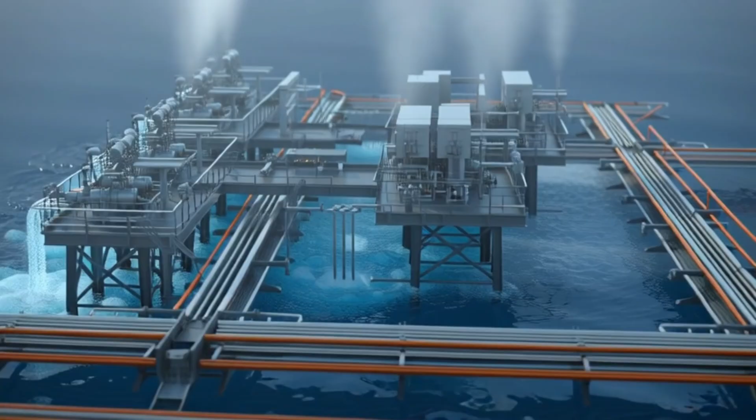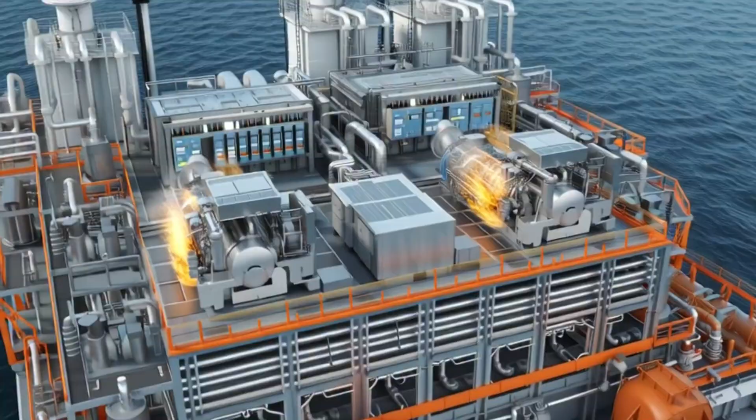Far beyond the coastline, where the ocean erases every trace of land, there exists a world built for endurance, precision, and survival in complete isolation. It is not a vessel built for transport. It is a permanent offshore industrial city, extracting, processing, storing, and exporting crude oil directly from beneath the ocean floor.

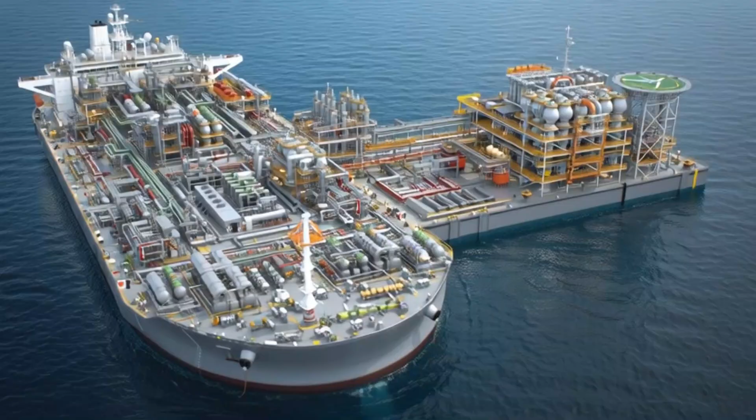These reservoirs remained hidden and unreachable for most of human history, locked inside porous rock formations, deep beneath layers of sediment and time. When the reservoir is reached, completion systems are installed, including steel casing, cement barriers, and safety valves that convert the well into a controlled production pathway.

Risers connect the seabed to the FPSO, carrying production upward through flexible structures designed to withstand constant motion caused by waves and currents. Each phase of separation is monitored by dense sensor networks that track pressure, temperature, and flow composition in real time across every processing module.

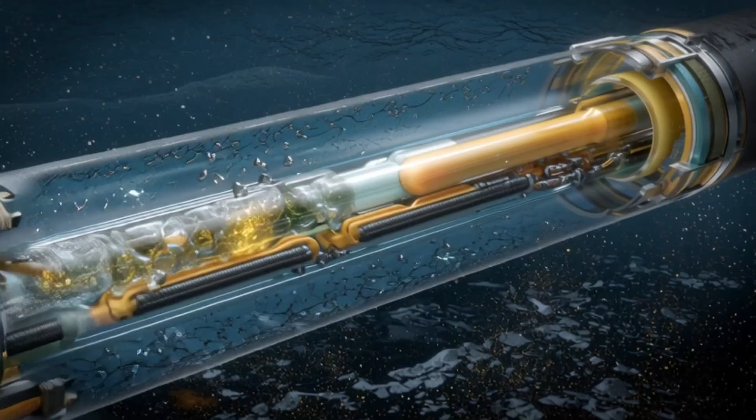These flow lines remain active regardless of surface conditions, ensuring uninterrupted energy transfer from reservoir to production system above the ocean. On the surface, the vessel continues to respond to subtle ocean movement, translating wave energy into controlled structural motion rather than resisting it directly.

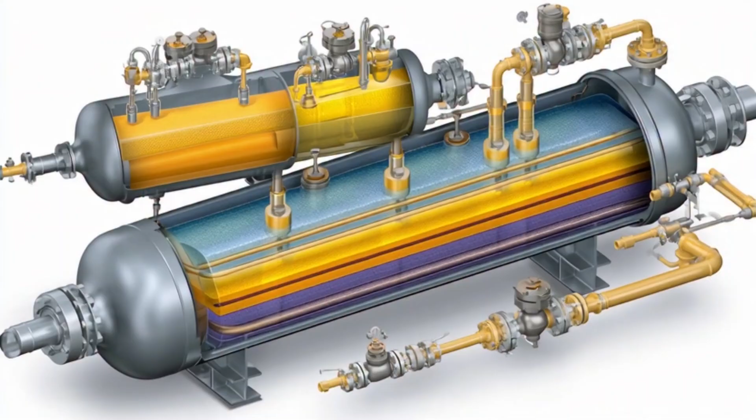As environmental conditions shift, structural loads are redistributed across the hull and mooring system to maintain balance and prevent excessive stress concentration. Even minor changes in pressure or temperature are immediately compensated through automated adjustments that preserve system equilibrium.

Cloud formations grow denser and more structured, indicating shifting pressure zones that slowly influence wind patterns across the offshore field. The FPSO does not wait for conditions to worsen. It begins adjusting operational parameters in advance to maintain equilibrium under evolving environmental stress.

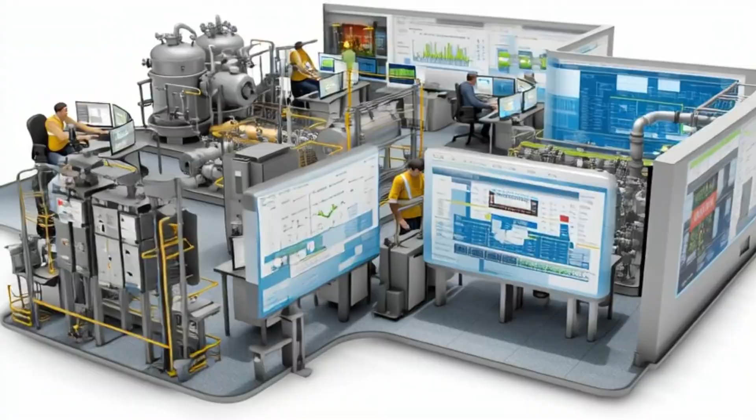Operators observe updated forecasting models that simulate potential storm development and its possible impact on offshore infrastructure. This engineered flexibility ensures that production remains stable, even as mechanical loads gradually begin to fluctuate more frequently. These early wave interactions are not yet dangerous, but they represent the beginning of a broader environmental transition.

This redistribution of operational stress is part of the system's core design, allowing it to remain stable under changing external forces. Inside processing units, automated systems maintain optimal separation efficiency, despite gradual shifts in incoming fluid composition.

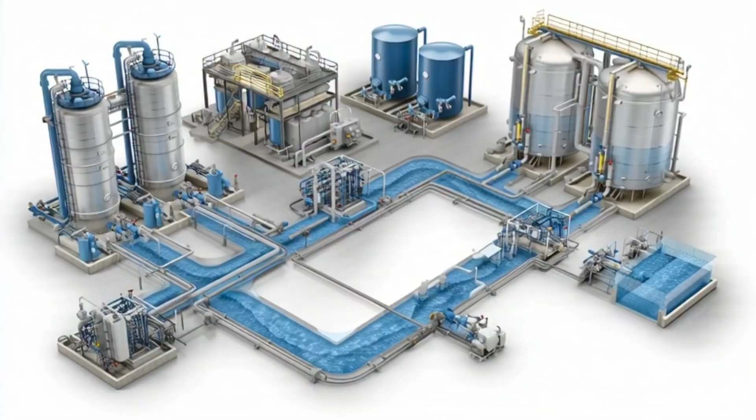Wind intensity increases gradually, creating stronger surface friction that starts shaping longer and more energetic wave formations across the field. Production continues, but with heightened operational awareness as systems prepare for potential load redistribution across processing and structural networks.

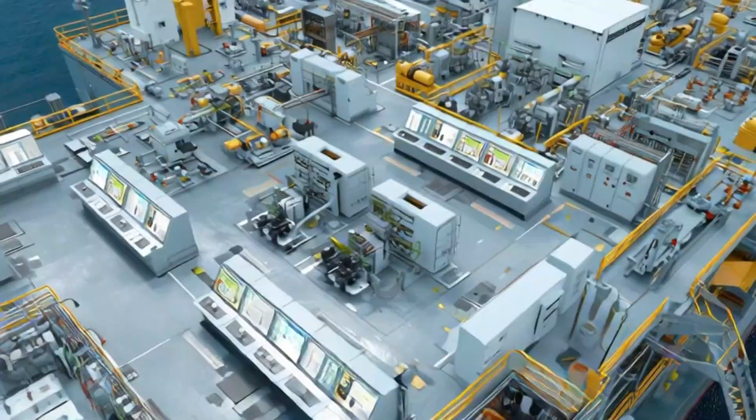Control systems adjust internal distribution of load across processing modules, ensuring no single subsystem becomes overstressed during environmental escalation. The vessel maintains stability through continuous feedback loops that adjust mooring tension, processing loads, and subsea flow regulation in real time. Processing units maintain output stability as internal automation compensates for external fluctuations in feed composition and pressure dynamics.

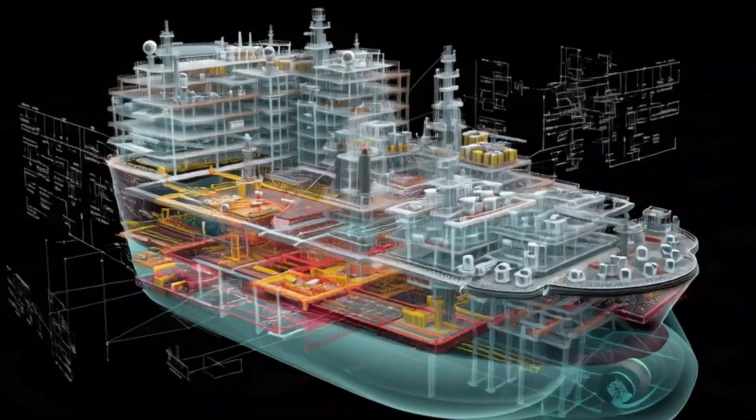The FPSO responds through engineered motion, allowing controlled displacement while maintaining stability through its mooring system and structural load distribution. Subsea systems remain active, transporting hydrocarbons through risers that flex continuously in response to increased surface motion and structural displacement.

The FPSO maintains operational continuity through dynamic adaptation, redistributing loads across multiple systems to prevent localized structural stress accumulation. Every subsystem operates under heightened supervision, with continuous data integration, ensuring that no deviation goes undetected or uncorrected.

This is the highest stress point of offshore operation, where engineering design is tested against the most extreme environmental conditions encountered at sea. The vessel maintains stability not through stillness, but through continuous adjustment to every changing force acting upon its structure. The FPSO maintains controlled stability throughout this transition.

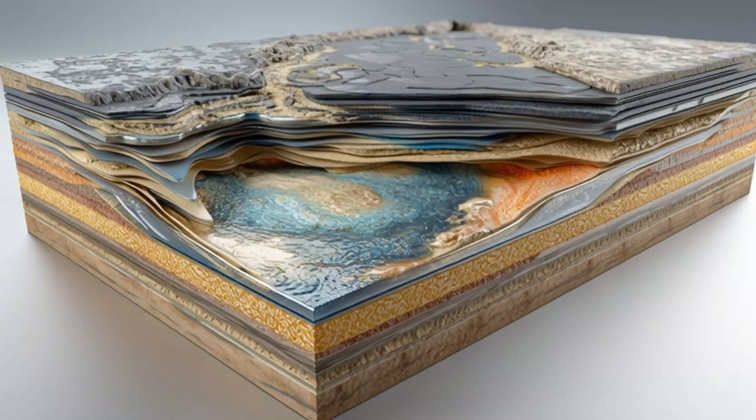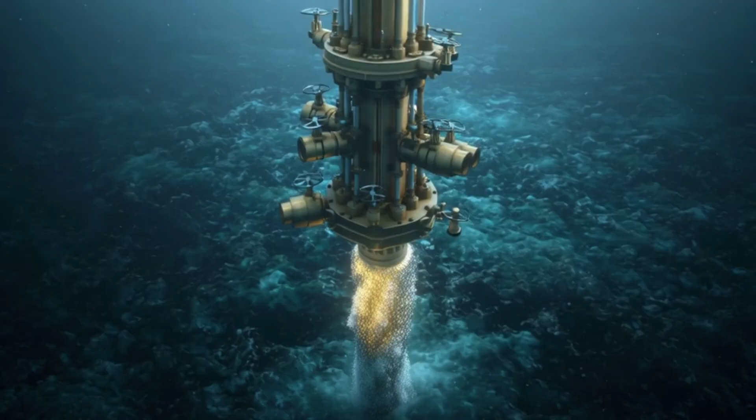Continuing reduced production while environmental forces gradually lose their extreme intensity. As conditions stabilize, internal systems begin recalibrating, restoring optimal efficiency in compressors, separators, and processing modules.

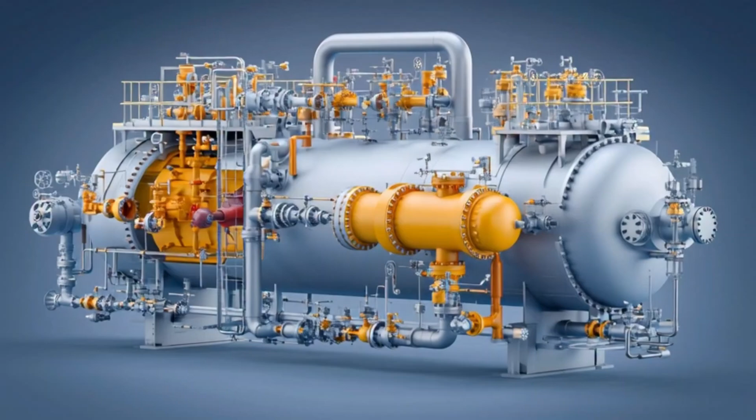Production rates are gradually increased under controlled conditions, ensuring that system load remains balanced during the recovery phase. Control rooms maintain structured oversight, ensuring that recovery progresses safely across all mechanical, structural, and subsea systems.

Subsea infrastructure continues functioning without interruption, demonstrating the long-term resilience of deep-water production networks. This phase represents controlled recovery, where offshore systems transition from emergency adaptation back to optimized production stability.

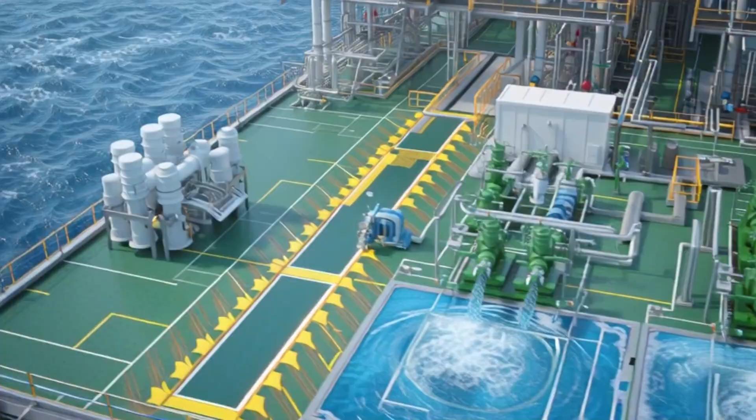Control systems shift fully out of recovery mode, returning to standard monitoring while maintaining continuous awareness of environmental variability. Subsea flow lines continue uninterrupted transport of hydrocarbons, demonstrating the long-term resilience of deep-water production architecture.

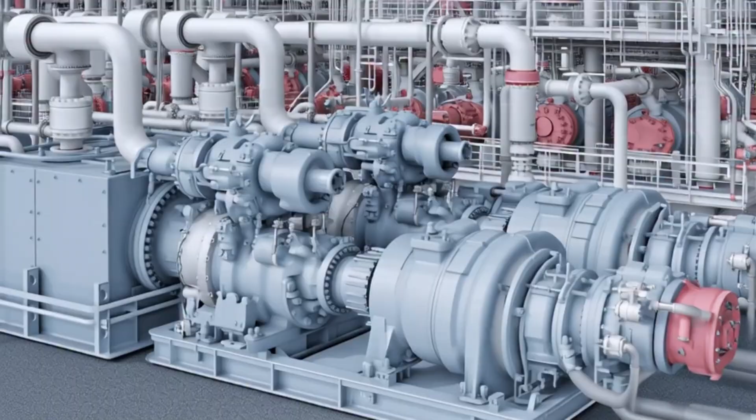Sensor networks continue to analyze system performance, comparing post-storm behavior with baseline operational models for accuracy validation. Control rooms maintain structured oversight, ensuring continuous synchronization between production output, storage capacity, and export readiness.

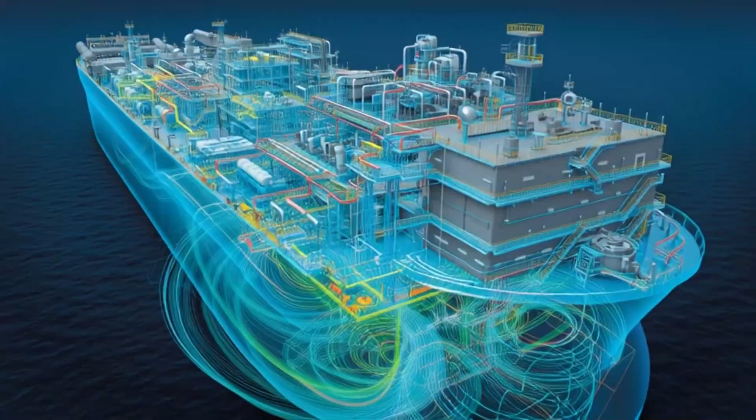Environmental influence remains constant but manageable, requiring ongoing adaptation rather than emergency response or structural intervention. This phase represents post-event stabilization, where the system consolidates performance improvements derived from real-world operational stress exposure.

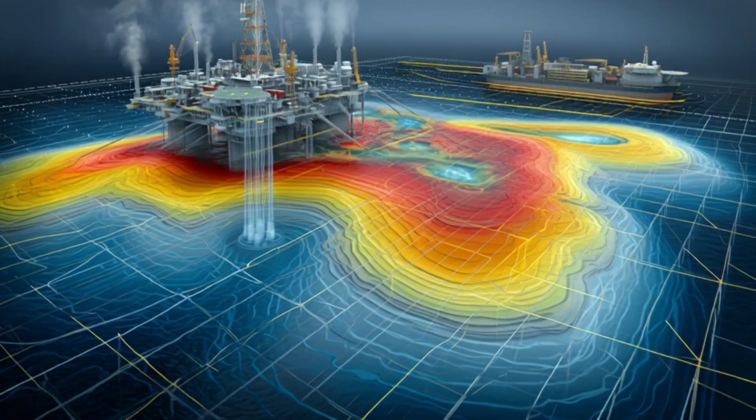Production systems operate in perfect synchronization, where thousands of interconnected components function as a single continuous offshore structure. Control rooms maintain full oversight of global operations, where engineers and operators coordinate real-time adjustments across all production systems. Flexible offloading systems ensure safe transfer between moving vessels, maintaining stability through continuous monitoring of pressure, flow, and motion dynamics.

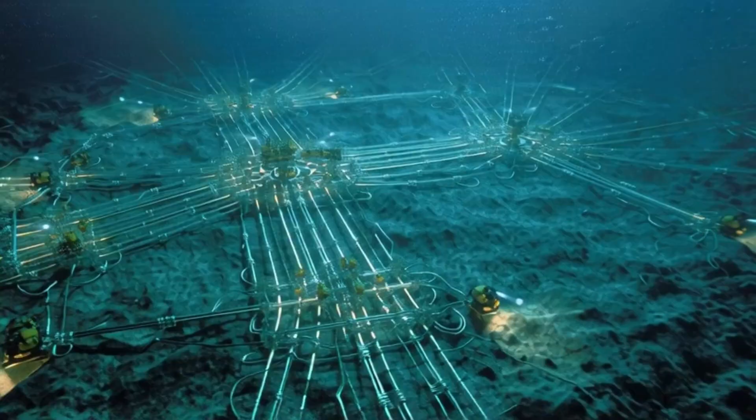Engineering systems evolve constantly, adapting to environmental conditions and operational feedback collected over years of offshore performance. Every storm, every cycle of production, and every operational adjustment becomes part of a growing legacy of offshore engineering knowledge. The balance between nature and engineering defines its existence, where constant adaptation ensures survival and productivity in a dynamic environment.

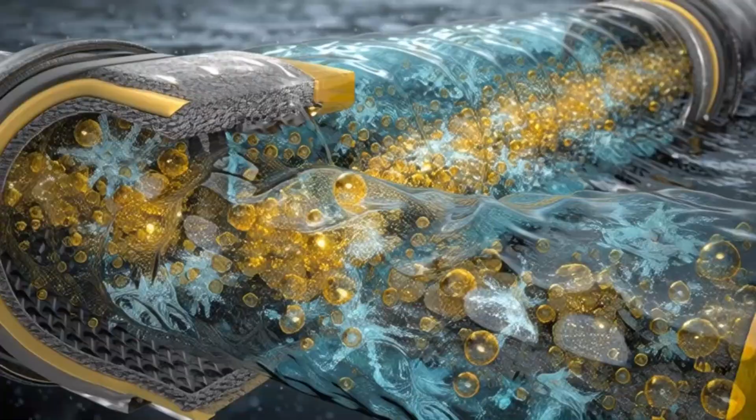Nothing here is temporary. Every system is engineered to operate continuously under extreme offshore conditions, where failure is not an option but a risk constantly managed. Hundreds of people live and work on board in continuous shifts, maintaining systems that must operate without interruption in one of the most isolated environments on Earth.

Modern offshore engineering changed this reality by developing technologies capable of imaging, drilling, and producing from extreme deep-water environments. What begins to flow upward is not pure oil, but a complex mixture of hydrocarbons, water, gas, and sediments moving under extreme pressure from deep underground.

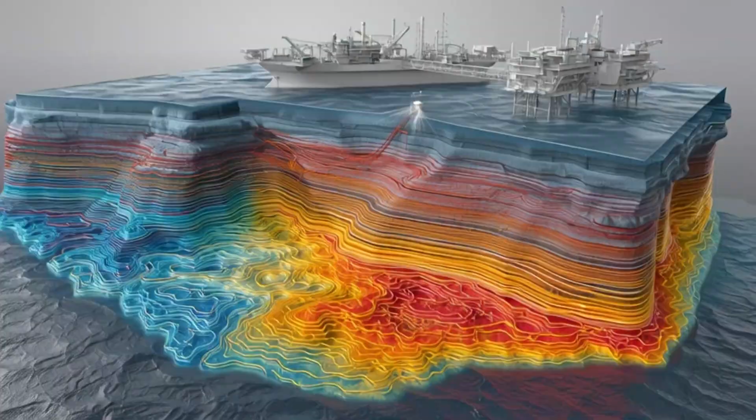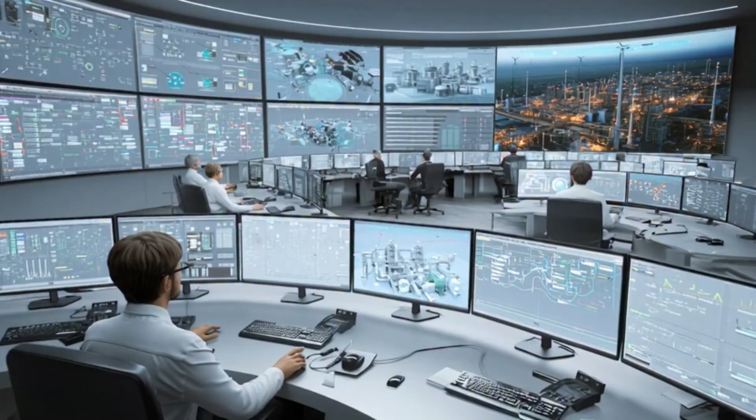When production reaches the FPSO, it enters massive separation systems, where gravity begins the first stage of processing by dividing gas, oil, and water. Inside the FPSO, separation systems continue the transformation of raw production into structured flow streams under constant pressure and controlled environmental conditions. The FPSO operates as a closed-loop industrial environment where extraction, processing, and storage occur simultaneously without interruption or downtime.

At the seabed, subsea trees regulate flow with precision valves that can adjust production rates or completely shut down wells if safety conditions require it. Every deviation from expected performance is instantly flagged, allowing rapid response before minor fluctuations can develop into operational instability.

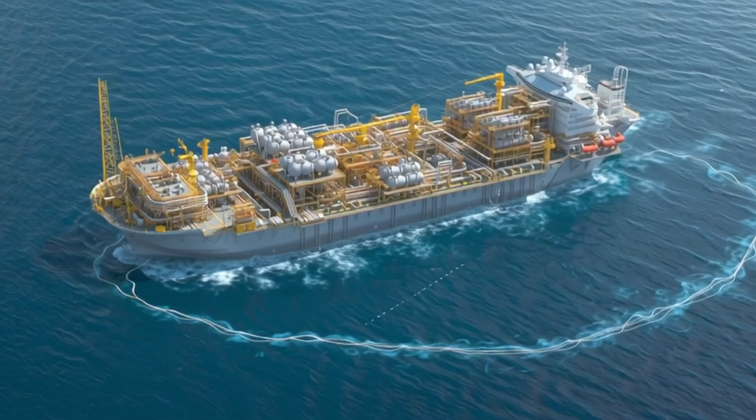Mooring lines anchor the vessel in position while allowing limited movement, creating a controlled range of motion essential for offshore operational safety. Each system is linked through integrated control architecture that ensures synchronization across production, safety, and structural monitoring networks. This is the foundation of offshore engineering, maintaining equilibrium in an environment that is never truly stable.

Onboard sensors detect subtle variations in barometric pressure, registering environmental changes long before they become visible to the human eye. At this stage, the ocean remains operationally manageable, but it is no longer fully calm, signaling the beginning of a new environmental phase. Subsea systems remain stable, continuing to deliver hydrocarbons from deep reservoirs through flow lines that are unaffected by surface atmospheric change.

Control systems integrate these changes into real-time models that adjust operational parameters to maintain safe production thresholds. Offshore operators maintain continuous observation, knowing that early detection of environmental shifts is critical for safe industrial continuity. Even minor fluctuations in wind speed are translated into measurable mechanical responses across the vessel's structural framework.

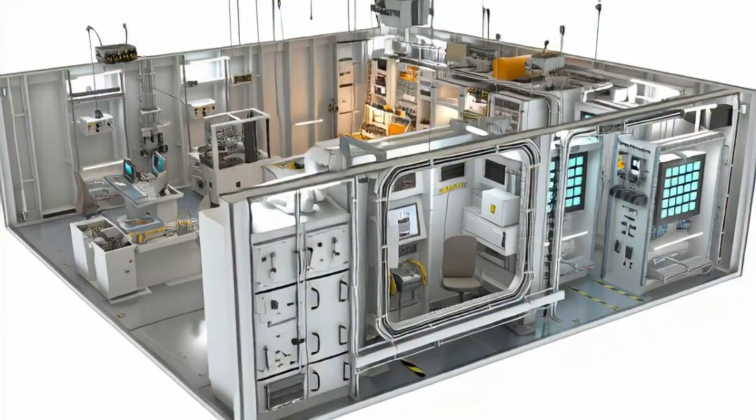The FPSO enters a phase of heightened awareness, where stability is maintained not through inertia, but through continuous predictive adjustment. The FPSO responds through controlled adaptation, maintaining position and operational balance while absorbing increased environmental energy through its mooring system. As wave energy increases, the vessel experiences deeper and more pronounced motion cycles that remain within designed operational tolerances.

Despite these changes, production remains continuous, supported by automated systems that constantly recalibrate flow rates and processing efficiency. Operators remain fully engaged in continuous observation, ensuring that any deviation from expected behavior is immediately analyzed and corrected. The FPSO remains in a state of controlled escalation, where environmental force increases but is continuously balanced by engineered adaptation.

Wave height increases significantly, and the ocean surface loses its previous structure, becoming a chaotic and continuously shifting field of force. Production continues under strict adaptive control, with flow rates automatically adjusted to maintain system stability under peak environmental stress conditions. Despite extreme conditions, all critical systems remain synchronized, ensuring that production, safety, and structural integrity operate as a unified network.

The vessel moves in deeper cycles, absorbing ocean energy while maintaining controlled positioning through tensioned mooring lines anchored to the seabed. At peak intensity, the ocean behaves as a fully active force system, where energy is continuously transferred between wind, water, and structural interaction.

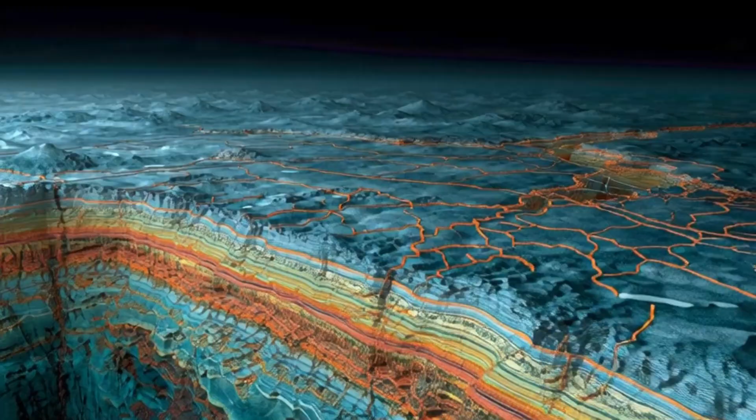Despite extreme environmental exposure, all critical systems remain operational, demonstrating the structural resilience of offshore engineering design. Automation systems adjust flow distribution to restore efficiency, while preventing sudden mechanical or pressure imbalances across processing units.

This information is integrated into operational models, improving predictive accuracy and strengthening future offshore response strategies. Even as calm returns, continuous monitoring ensures that all systems remain prepared for future environmental variability and offshore risk exposure.

Operators confirm system stability through comprehensive checks across all production, safety, and subsea infrastructure networks. Inside processing modules, compressors and separators operate at optimal efficiency, recalibrated after extended exposure to high-stress environmental conditions.

This data becomes essential for refining predictive models and improving future offshore operational strategies under similar conditions. The FPSO resumes its long-term operational rhythm, balancing extraction, processing and storage within a continuously adaptive system.

The vessel continues to operate as a floating industrial ecosystem, designed for permanent interaction with one of the most dynamic environments on Earth. Continuous monitoring ensures early detection of any anomalies, preserving long-term stability and preventing future operational disruptions.

The vessel stands as a floating industrial ecosystem, continuously extracting, processing, storing and exporting energy from deep beneath the ocean floor. Every subsystem on board the FPSO operates under continuous monitoring, ensuring that production efficiency and structural integrity remain within optimal parameters.

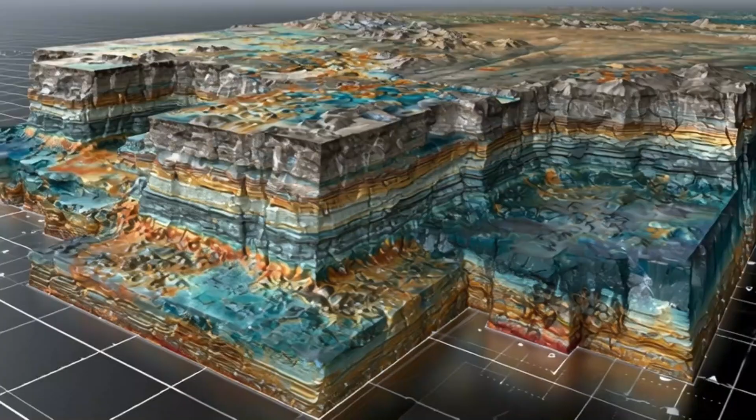This accumulated experience strengthens future designs, improving resilience, efficiency and safety in the next generation of offshore systems. And in the endless blue of the open sea, the FPSO stands as a silent, continuous engine of global energy transformation.

At first it appears to be a ship alone in the ocean, but as distance closes, that illusion breaks, revealing a massive industrial structure rising above the sea surface.

Engineers, operators, technicians and safety specialists all function as part of a single integrated system where every decision affects the stability of the entire facility.

Before drilling begins, seismic surveys send acoustic waves into the Earth and analyze their reflections to map hidden geological structures beneath the seabed. At the seabed, subsea trees regulate flow, monitor pressure, and provide emergency shutdown capability, acting as the primary control interface between reservoir and surface systems.

Far below the vessel, subsea pipelines continue transporting hydrocarbons through kilometers of engineered flow lines designed to withstand pressure, corrosion, and constant motion. Control rooms remain the operational core of the system, where engineers oversee thousands of variables simultaneously through integrated digital monitoring platforms.

This balance between restraint and flexibility defines the engineering principle that allows floating production systems to operate in deep water environments for extended periods.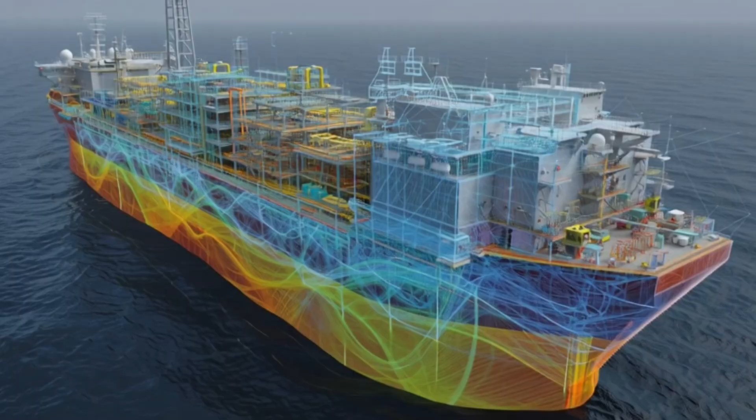The FPSO does not operate as separate machines, but as a unified organism of industrial processes working in constant coordination. Far from the stability of the control rooms, the ocean begins to show early signs of atmospheric change as distant weather systems reorganize across the horizon.

Wind patterns shift gradually across the ocean surface, altering wave formation dynamics and introducing subtle irregularities in sea behavior. Production continues without interruption, but with increased awareness of external conditions that may require future operational adjustment.

Risers respond to this change with flexible movement, compensating for increased oscillation between seabed infrastructure and floating production unit. As conditions evolve, the FPSO adjusts internal flow distribution to ensure that no single processing line experiences excessive load variation.

Gas, oil and water separation continues uninterrupted, supported by continuous calibration of pressure and temperature conditions. Operators observe the shift in real-time data streams, where small fluctuations in pressure and wave height begin forming consistent upward trends.

This movement is not instability, but engineered response, where the structure is allowed to move in controlled patterns to dissipate external force. Inside the FPSO, all critical systems remain synchronized, ensuring that operational integrity is preserved across mechanical, electrical, and digital layers.

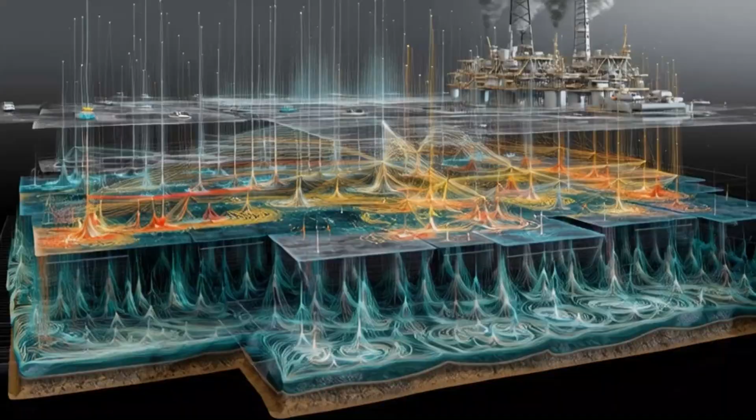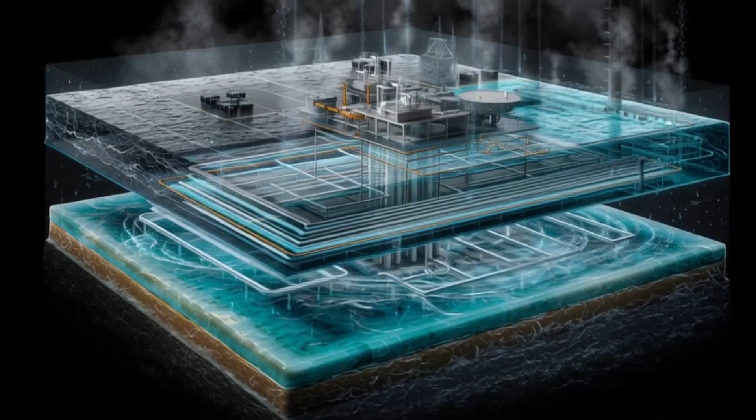The ocean now exerts a stronger influence on vessel motion, requiring tighter coordination between structural response and production system stability. This phase represents the transition toward peak offshore stress conditions, where system responsiveness becomes critical to maintaining full operational continuity.

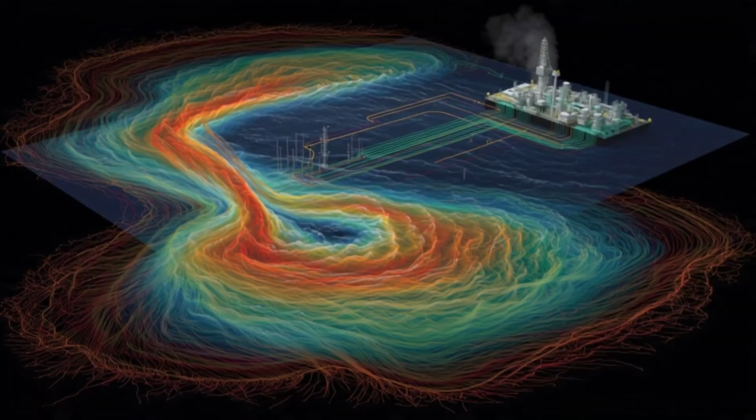Inside control rooms, all monitoring systems shift into maximum awareness mode, tracking real-time changes in structural stress, production flow, and environmental impact. The interaction between vessel motion and subsea tension becomes more intense, requiring precise coordination between mechanical flexibility and flow stability.

Wave systems now interact in complex patterns, creating overlapping forces that challenge traditional predictability of offshore environmental behavior.

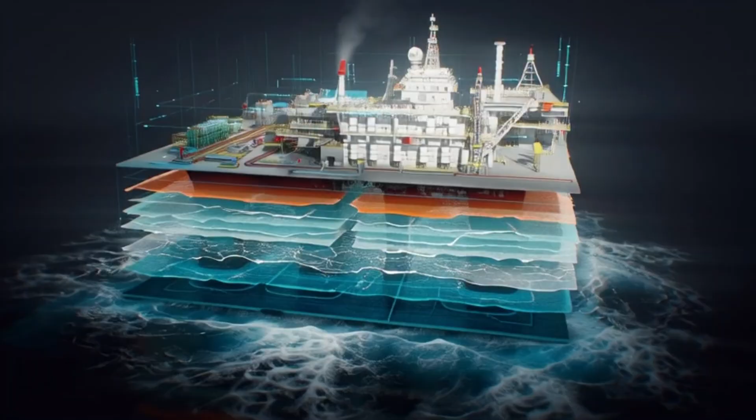The FPSO does not resist these forces directly, but maintains equilibrium through controlled flexibility and distributed structural response. Even at peak environmental stress, production remains active, though carefully regulated to ensure all systems operate within safe design parameters. The vessel continues to move with residual ocean energy, but motion cycles become less extreme and more consistent with engineered design expectations. The FPSO re-enters a phase of operational normalization, where stability is achieved through continuous monitoring and adaptive system calibration.

The recovery phase reinforces the importance of adaptive engineering, where systems evolve through real environmental exposure and operational feedback. Production rates are restored gradually to optimal levels, ensuring that no sudden load transitions affect system integrity after the storm cycle. The FPSO demonstrates full recovery capability, returning to stable production while retaining all data collected during extreme environmental exposure.

Human expertise remains central to system performance, ensuring that engineering decisions align with real-time operational and environmental conditions. The offshore system evolves through each cycle, becoming more resilient and efficient as it adapts to recurring environmental challenges. As full operational stability returns, the FPSO resumes its complete industrial rhythm in the open ocean, surrounded by vast and uninterrupted sea in every direction.

The ocean remains present in constant motion, but now serves as a stable operational environment rather than a source of disruption or extreme stress. As storage levels rise, export operations are prepared through precise coordination of shuttle tanker scheduling and environmental condition analysis. Maintenance and inspection routines ensure long-term reliability, preserving structural integrity across all mechanical and subsea infrastructure.

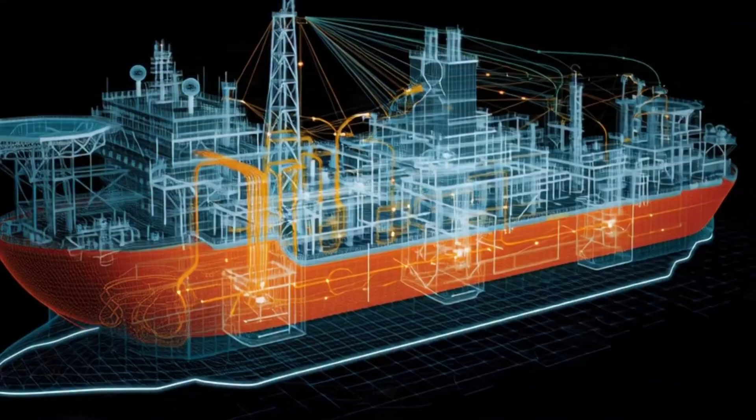Inside processing modules, automation systems adjust compressor performance and separator efficiency to maintain stable output under fluctuating input conditions. Control rooms continue to function as the decision core, coordinating responses across thousands of variables in real time with no interruption in communication. Wind speed decreases incrementally and rain intensity weakens, allowing visibility to gradually return across offshore operational zones.

Subsea production remains uninterrupted, with flow lines and risers continuing stable transport of hydrocarbons despite reduced surface turbulence. Every component is reviewed through sensor data analysis, comparing real-time performance metrics with baseline operational standards. Data from the storm event is analyzed in detail, providing critical insights into system performance under extreme environmental stress.

The FPSO gradually returns to its primary operational rhythm, balancing production, storage, and export readiness under stabilized conditions. The vessel continues forward in equilibrium, fully functional and stabilized after one of the most demanding operational cycles of offshore production. As offshore conditions return to near normal stability, the FPSO resumes full operational continuity across production, processing, and storage systems.

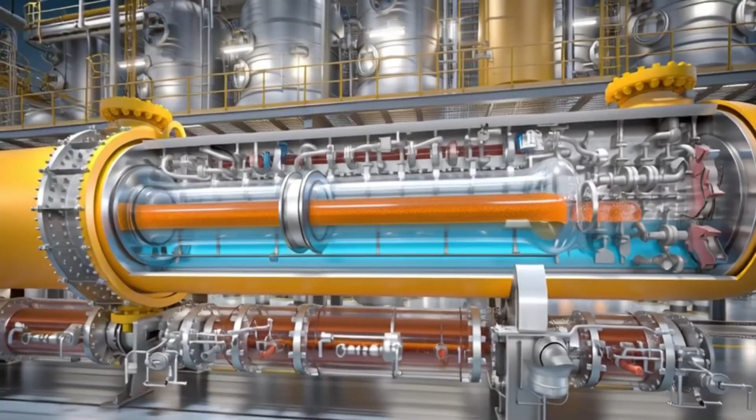The FPSO is not simply a machine, but a fully integrated industrial environment operating continuously in one of the most extreme locations on Earth. From the surface, the FPSO appears distant and silent, but within it operates a vast network of continuous industrial activity. As long as energy remains beneath the ocean floor, these floating systems will continue to operate, evolve, and endure across decades of offshore production.

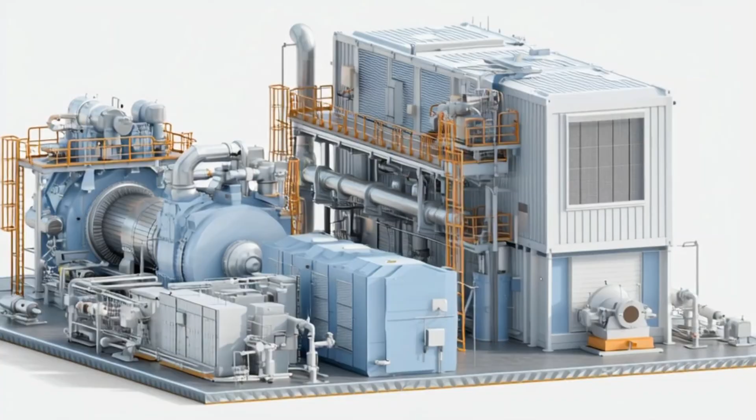These subsurface images reveal potential reservoirs where oil and gas may be trapped, allowing engineers to plan drilling operations with high precision and reduced uncertainty. Once a viable reservoir is identified, offshore rigs begin drilling through kilometers of water and rock using highly controlled directional drilling systems. Automation systems continuously adjust internal parameters to maintain efficiency, ensuring that fluctuations in incoming reservoir fluid do not destabilize production quality.

Every component of this network is designed for long-term autonomy, operating for years without physical intervention while maintaining real-time communication with the FPSO. Production adjustments are made continuously, not as isolated actions, but as part of a constantly evolving optimization process driven by real-time data. Subsea infrastructure remains stable, though the interaction between surface motion and riser flexibility becomes increasingly dynamic and continuous.

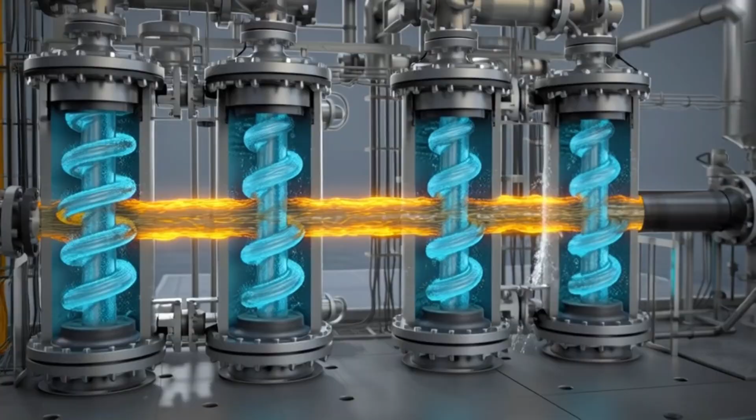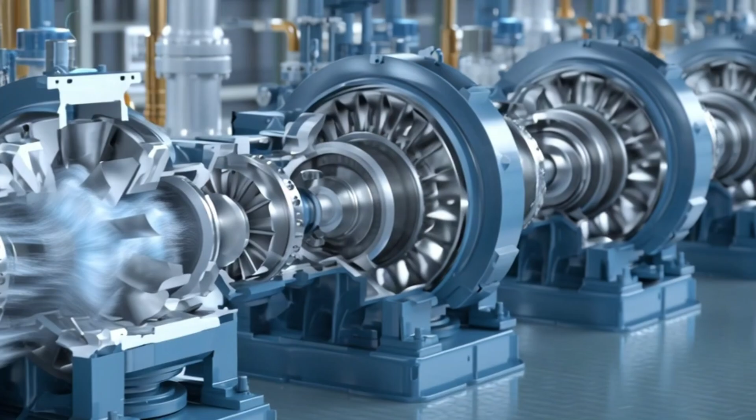The ocean surface becomes more fragmented, with intersecting wave patterns, generating irregular energy fields that challenge visual and structural predictability. As environmental stress increases, safety protocols shift toward higher sensitivity thresholds, preparing the system for potential controlled reduction if needed. Even minor increases in wave height translate into measurable changes across the FPSO's structural load distribution and motion profile.

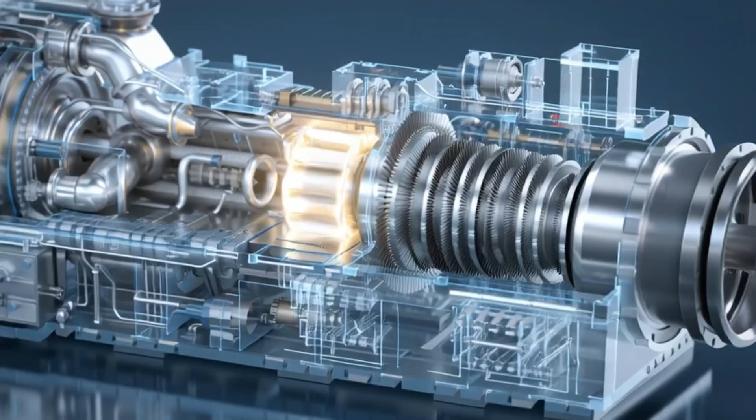Safety protocols escalate automatically, with emergency thresholds actively monitored to prepare for controlled reduction if environmental limits are exceeded. Operational decisions are executed in real time, balancing production continuity with strict safety constraints to preserve long-term system integrity. Control systems shift from maximum alert mode back toward high vigilance monitoring, maintaining readiness while reducing emergency response sensitivity.

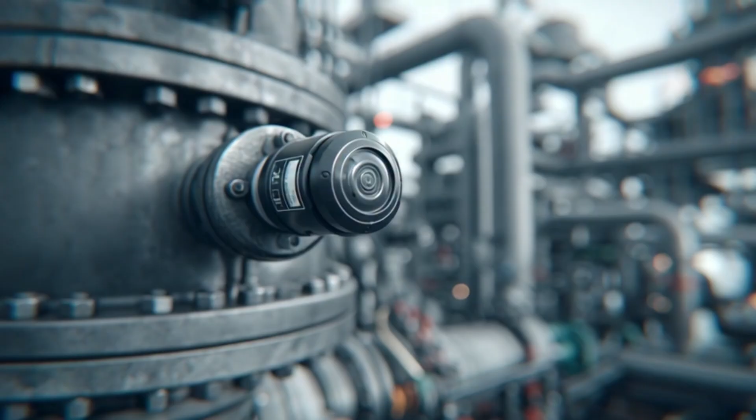Maintenance teams initiate preliminary inspections of external structures, carefully assessing potential stress impacts caused by peak storm conditions. The ocean continues to settle, but never returns to complete stillness, maintaining a constant influence on vessel dynamics and operational stability. Environmental forces remain present, but significantly reduced, allowing offshore systems to resume standard operational rhythms.

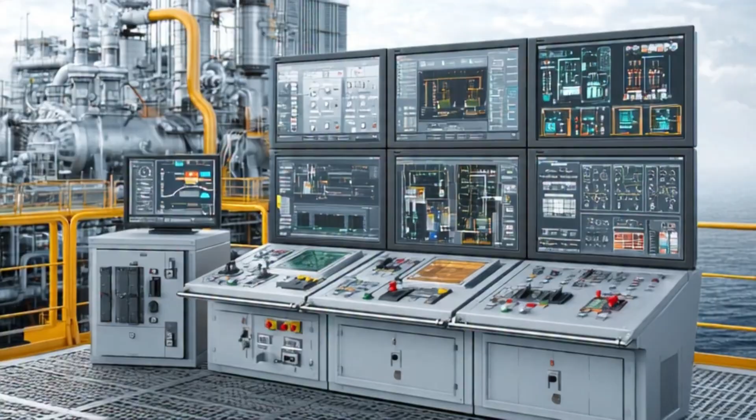The ocean remains active but significantly calmer, with wave systems returning to longer, more predictable patterns that reduce structural stress on the vessel. Maintenance teams complete detailed inspections of structural components, confirming that no critical damage occurred during peak storm activity. Over time, accumulated operational experience strengthens system reliability, improving both efficiency and resilience across offshore production cycles.

Far beneath the surface, geological formations continue releasing hydrocarbons formed over millions of years under extreme pressure and temperature. It represents the convergence of engineering precision, environmental adaptation, and human expertise working together in real-time offshore conditions.